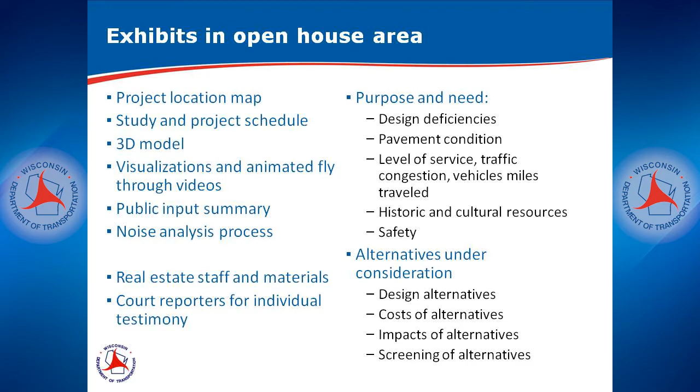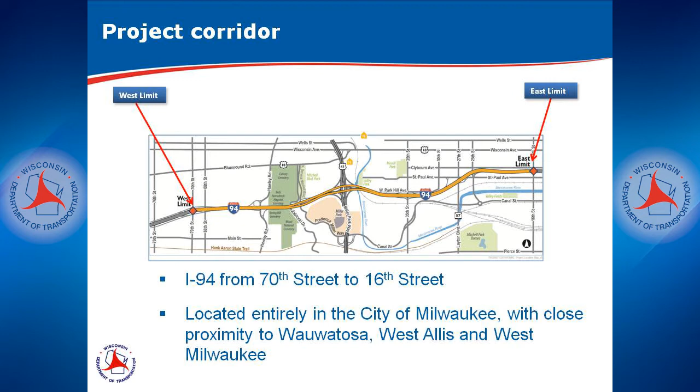Let me now review the background of the project. Our corridor extends from 70th Street to 16th Street in the city of Milwaukee. It's the segment of I-94 which connects the Marquette Interchange and Zoo Interchange projects. The project alternatives and recommendations must address the deteriorated pavement and infrastructure, the traffic congestion in the corridor, safety issues on the freeway, and the impacts on the local street network.

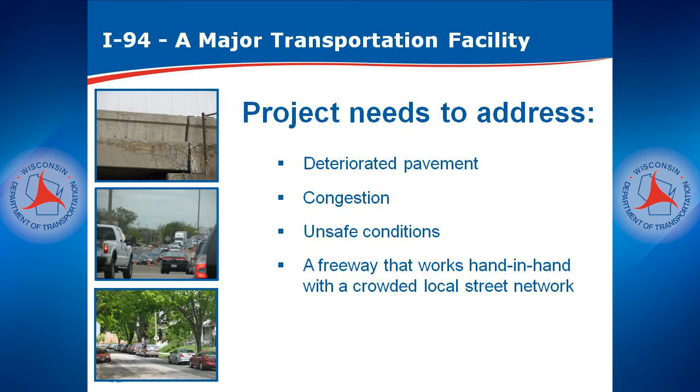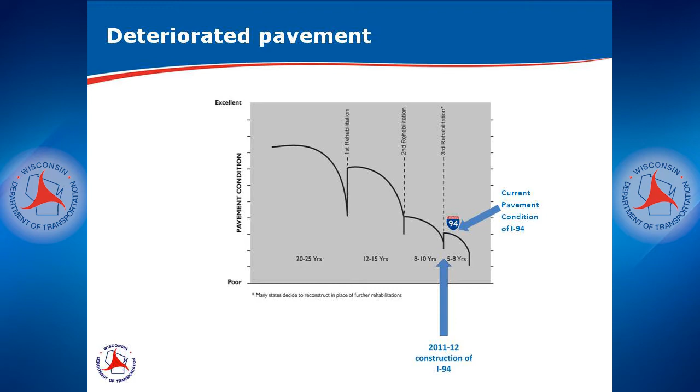The original freeway was built over 50 years ago, and the Wisconsin DOT has completed the third rehab of the pavement. As this chart illustrates, there are diminishing returns with each resurfacing of the freeway. The pavement can no longer be rehabilitated. The existing traffic data shows a failing system. The red on this graph indicates the existing severe congestion during the morning commute.

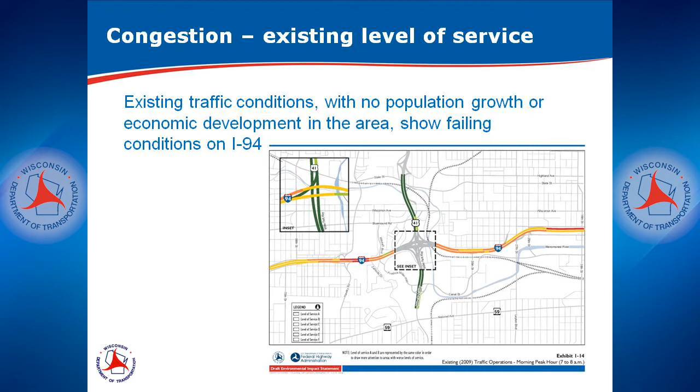In our study, we examine future trends that reflect future growth in population and economic activity. But even without additional traffic, the system is already showing severely congested conditions. The study team analyzed the safety issues in the corridor, with the main causes of crashes resulting from the substandard design issues and increasing congestion.

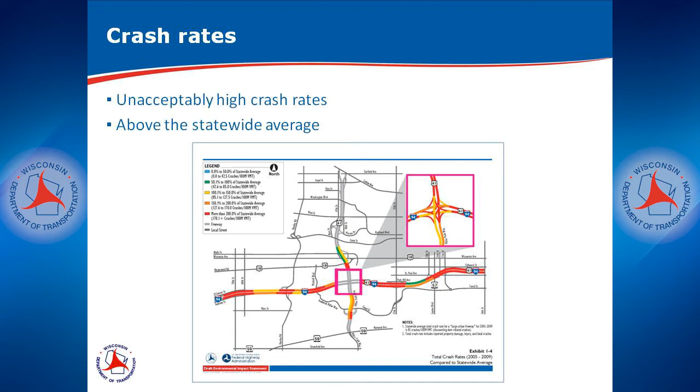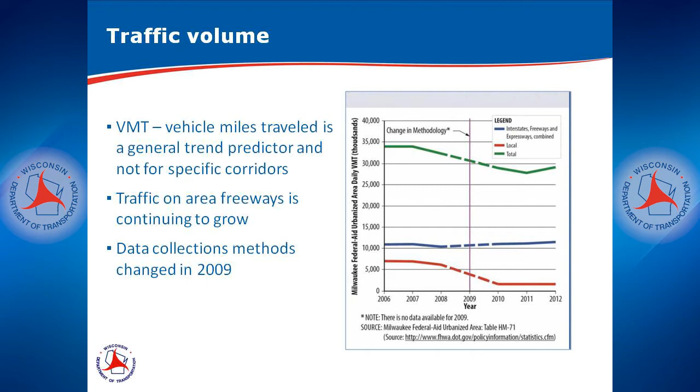Vehicle miles traveled is a tool used to examine large-scale driving trends, but is not used to forecast traffic on a particular road or corridor. While data collection methods changed in 2009, the comparison of traffic data on area freeways shows continual growth. Traffic forecasting is done using historic annual daily traffic. For the most recent 25-year period, the data shows a growth rate of over 1%.

For the forecast growth over the next 30 years, we are using a very conservative growth rate of half that number, 0.5% per year. In recent years, the fluctuations in data on this corridor can be traced back to each resurfacing and major construction project in the area.

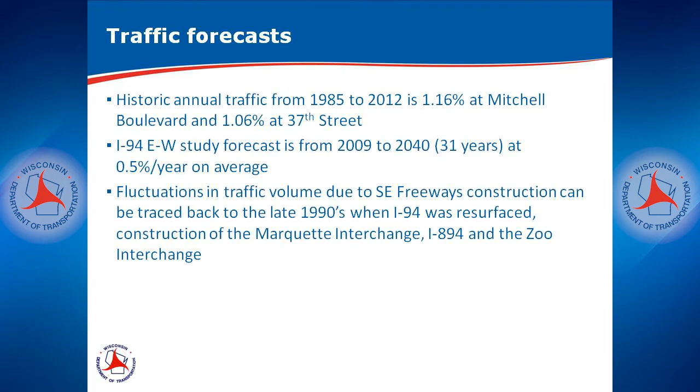It is also important to remember that I-94 is an interstate highway, not a local road. It has regional and statewide importance, in addition to importance to the local economy. The city of Milwaukee is the premier destination in the state, and it is the responsibility of the Wisconsin DOT to provide safe, reliable transportation in and around the city.

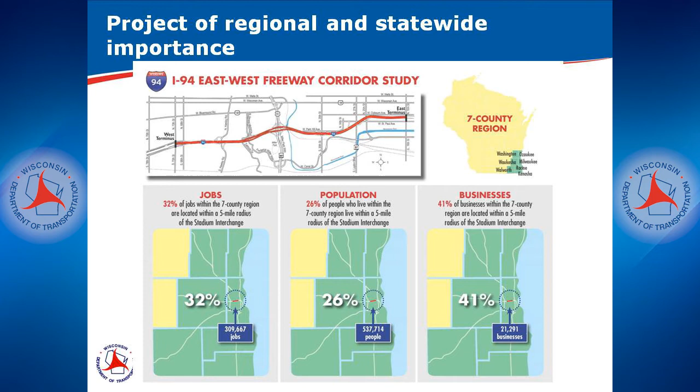These illustrations show the regional importance of the corridor. Within 5 miles of the stadium interchange, there are 32% of the jobs in the 7-county region, 26% of the population, and 41% of the businesses.

The Wisconsin DOT must select an alternative that addresses the long-term fix for this stretch of interstate. We cannot make a recommendation that does not address pavement, congestion, and safety issues. We need 8 lanes to handle the existing and future traffic, and we have heard clearly from stakeholders the desire to maintain as much access as possible.

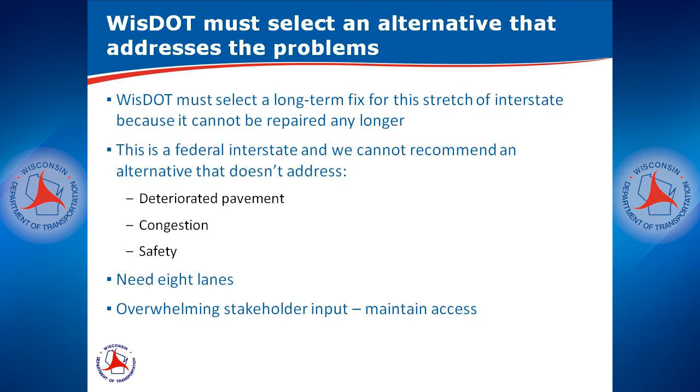We will now review the various alternative designs considered during the course of the study. The replace in-kind alternative did address the issue of aging infrastructure, but failed to address the concerns of substandard design, congestion, and impacts to the local street network.

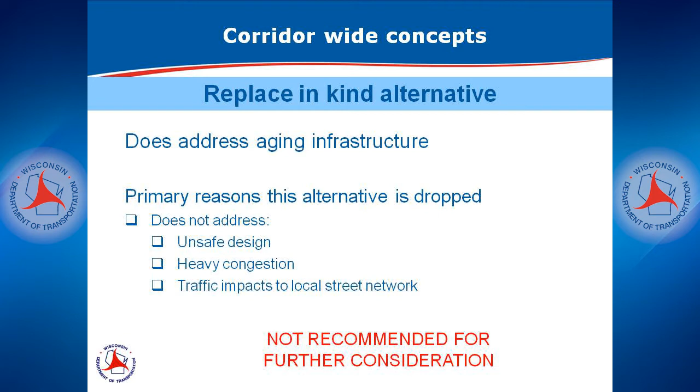This alternative is no longer under consideration because it does not address the purpose and need. For similar reasons, the spot improvement alternative was dropped from further study because it failed to address the concerns of substandard design, congestion, and impacts to the local street network. This alternative does not address the purpose and need.

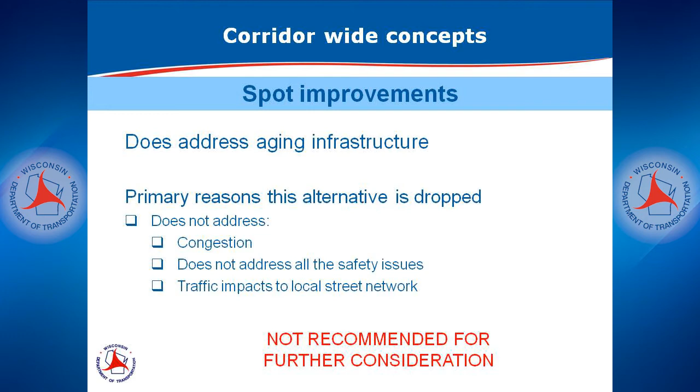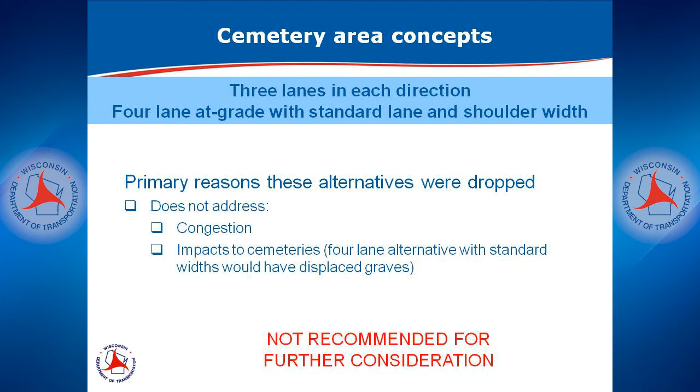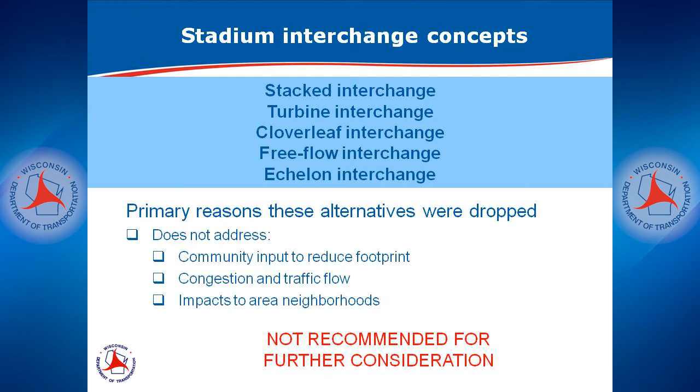Two modernization alternatives in the cemetery area were dropped from further consideration because they either do not address the traffic and safety issues with fewer lanes or would have caused unacceptable impacts to the cemeteries. Many alternatives were considered for the redesign of the stadium interchange. They were dropped due to impacts to surrounding areas, larger than acceptable footprint, and inability to address congestion and traffic flow. We have 3 remaining alternatives in the west segment and 2 in the east segment.

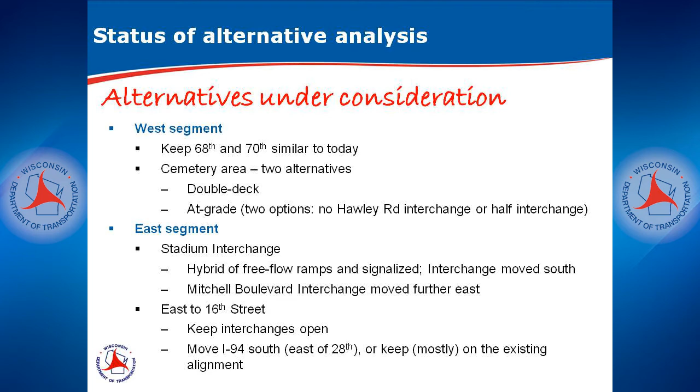In the west, we will keep the 68th/70th Street exit very similar to today's design. In the cemetery, there are 3 remaining alternatives: the double deck with a full interchange at Hawley, the at-grade with no access at Hawley, and the at-grade with partial access at Hawley. Each alternative provides 8 lanes. In the east segment, there are 2 alternatives. One keeps the freeway in a very similar alignment as it is today, and the other moves the freeway south and realigns the entrance and exit points near 27th Street.

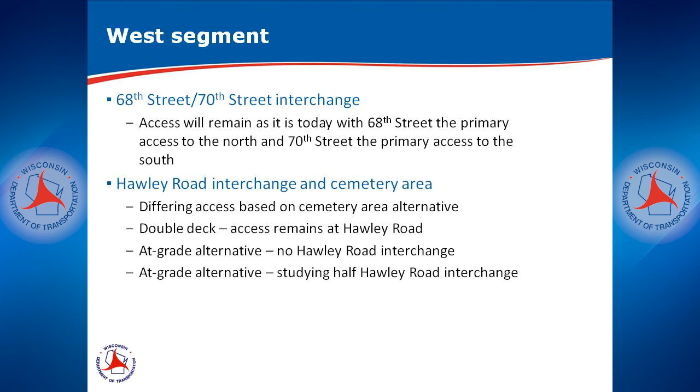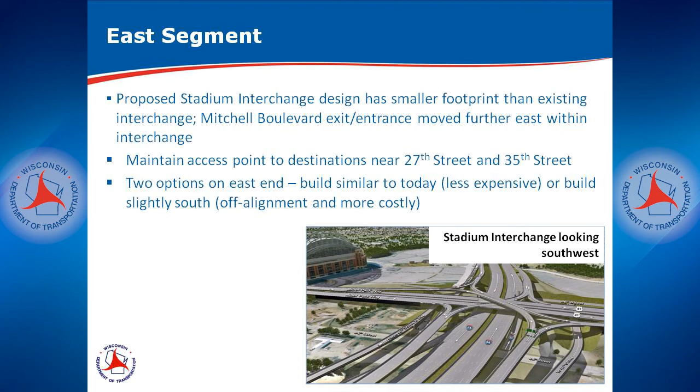Again, on the west end, we recognize the importance of keeping 68th Street traffic flowing north into Milwaukee and Wauwatosa, and 70th Street operating smoothly for traffic in Milwaukee and West Allis. The cemetery area is where the challenges lie. The Wisconsin DOT has maintained a commitment to the cemeteries that we will not relocate graves. The proposed stadium interchange design has a smaller footprint than other alternatives previously considered. The design includes an embedded interchange to replace the Mitchell Boulevard interchange to the east. As mentioned, the 2 remaining options on the east end are different in cost and access points.

For over a year, the study team and the Federal Highway Administration have consulted with parties interested in the historic properties in the area. The cemeteries and the VA grounds are home to historic areas, and we have worked with the interested groups to determine the potential impacts of the alternatives. The at-grade alternative can be designed in such a way that would have no impact. The group concluded the double deck would have an adverse effect on the National Historic Landmark, cemetery, and local neighborhood. The impacts of the alternatives are described in detail in the draft EIS.

This chart illustrates the differences in cost and property impacts. In terms of residential impacts, the most significant impact is in the west segment, where the double-deck alternative requires 10 housing units compared to 5 for the at-grade. The double deck would cost about $180 million more than the at-grade alternative. On the east segment, the off-alignment costs about $100 million more, but impacts about the same number of buildings.

This slide shows some general conclusions reached from our interaction with the public. The stakeholders within and outside of the corridor tell us that we need to improve safety and maintain as many access points as possible. The primary difference between the input received is that stakeholders within the corridor are very concerned about impacts to the surrounding area, whereas stakeholders who use the freeway but live outside of the corridor tend to be more concerned about increasing capacity and decreasing delay.